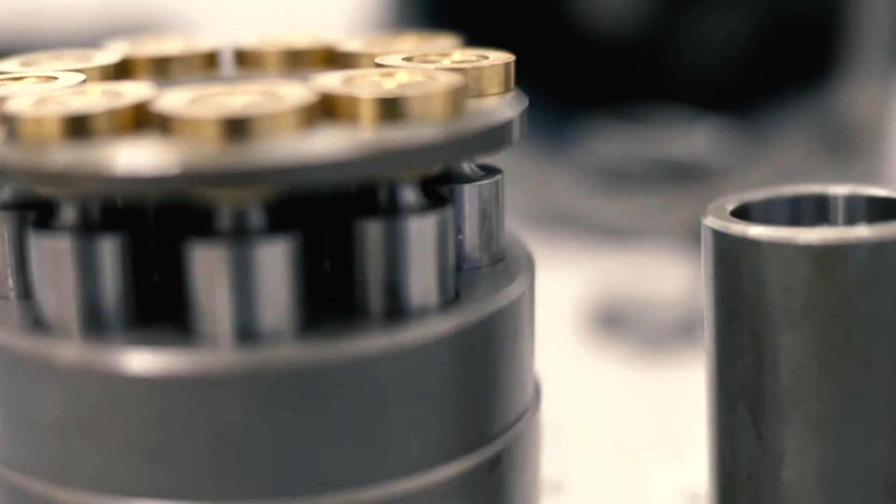My name's Oliver Starr. I'm Managing Director and owner of Zeus Hydratech.

Zeus Hydratech are a hydraulic component supplier. We are authorised distributors for various major manufacturers of hydraulic components, and we distribute throughout the UK and internationally.

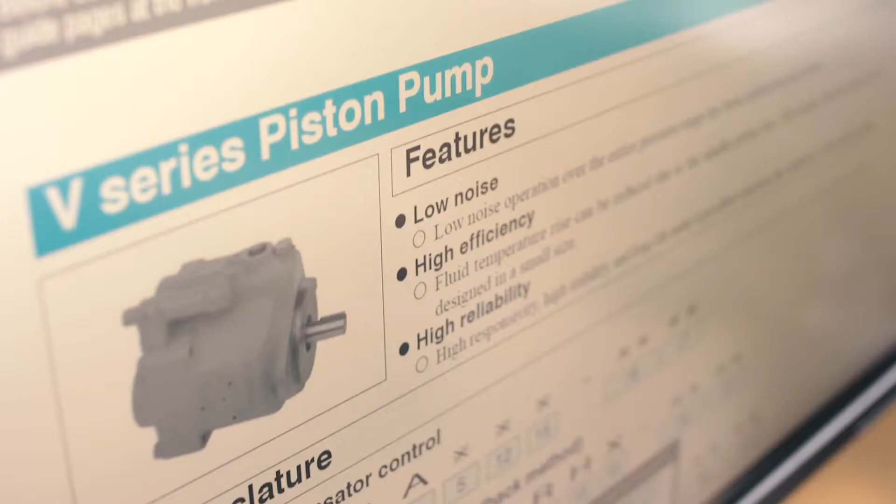We want to make sure that we represent quality and reliability as opposed to low value, high volume components. That's why I made the decision a while back that I wanted to be the one that's helpful, the supplier that could actually come back to them in a timely manner, give them the information that they wanted.

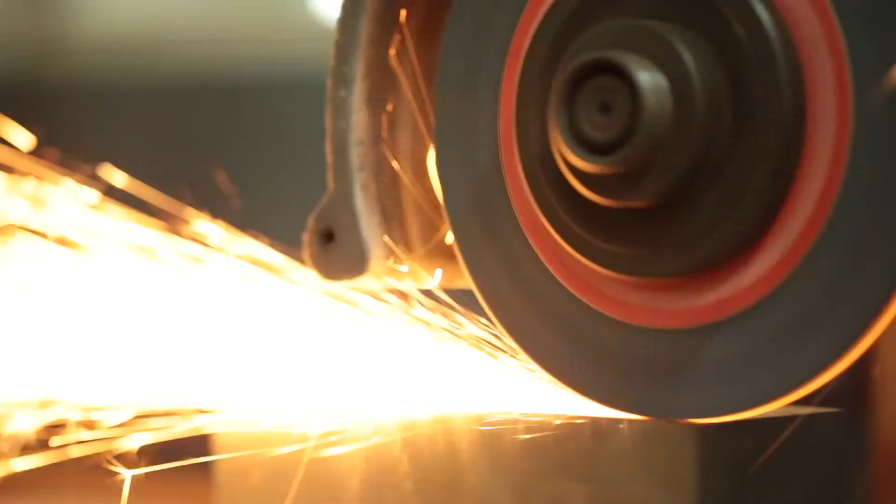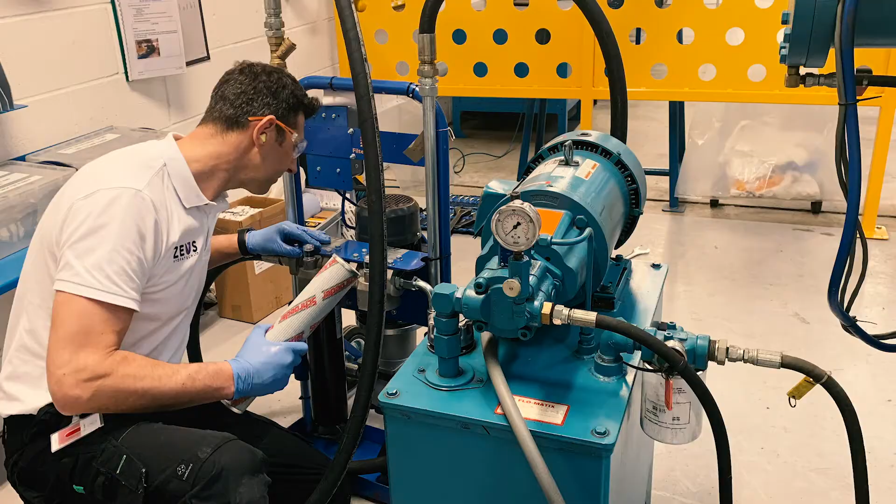Give them professional quotations, deliver goods on time, do what we say we're going to do. We appreciate that manufacturers don't always have their own in-house hydraulic engineers, or they have engineers that perhaps don't have the expertise to look after their own equipment. So within the local region, we offer the service to go to sites and give complete refurbishment of their hydraulic power pack systems.

Redcliffe do a lot of AOG work, which is aircraft on ground - it's emergency spare part manufacturing. In an instance where we get Airbus calling us saying we need this component as soon as you can get it, we can't afford to have machinery break down.

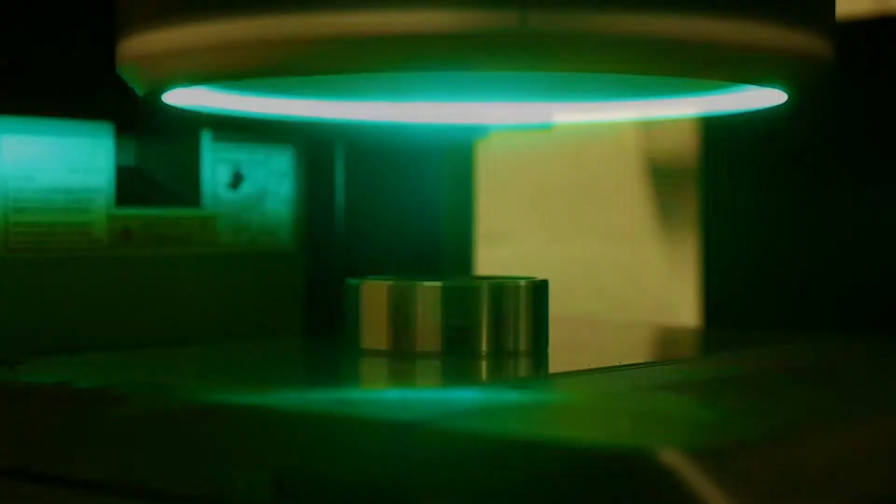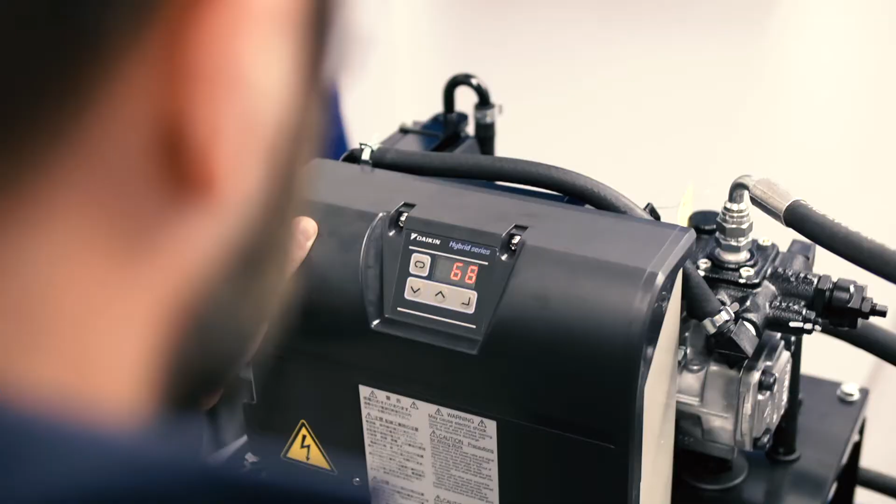We had a problem with an old machine where the configuration of the power pack wasn't quite correct, even though we'd followed all the information that came with the machine. And Zeus went way beyond what I was expecting. They sent a man out instantly, took the power pack back and configured it correctly so it would work with the machine and silence the alarm that was going off.

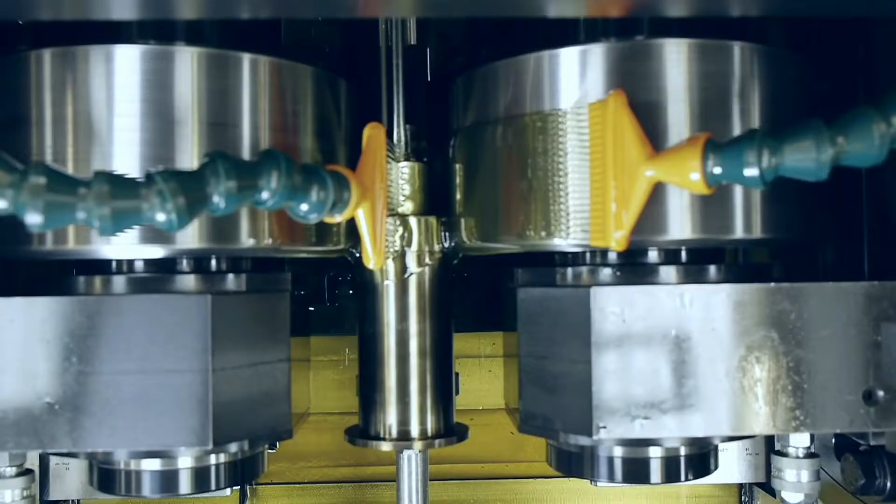Given the size of the contract for Redcliffe, it was important that we were able to react quickly. The fact that we've been able to give them that service has given them complete reassurance and confidence in Zeus, and that's why they continue to come back to us and rely on us the way they do.

They obviously know their kit inside out. And in fact, one of the independent machine vendors just said, just go to Zeus Hydratech, they know what they're doing. We'll just add a margin and make it complicated.

Downtime for manufacturers is clearly an undesirable scenario, so the reason we nominate quality hydraulic components is to ensure that downtime is reduced to an absolute minimum. One thing that has allowed us to work with some fairly big names is the fact that we are ISO 9001 accredited, which is the quality system.

We were approached by a major Formula One racing team. They were actually after a simple filtration system to prevent moisture entering their hydraulic system. As the packs are being flown to different countries, they were having issue with moisture ingress.

That conversation very quickly led on to them asking if we could design a new hydraulic power pack system, which was quite a complex design. It had to be very compact. It had to increase on the pressure that it could achieve.

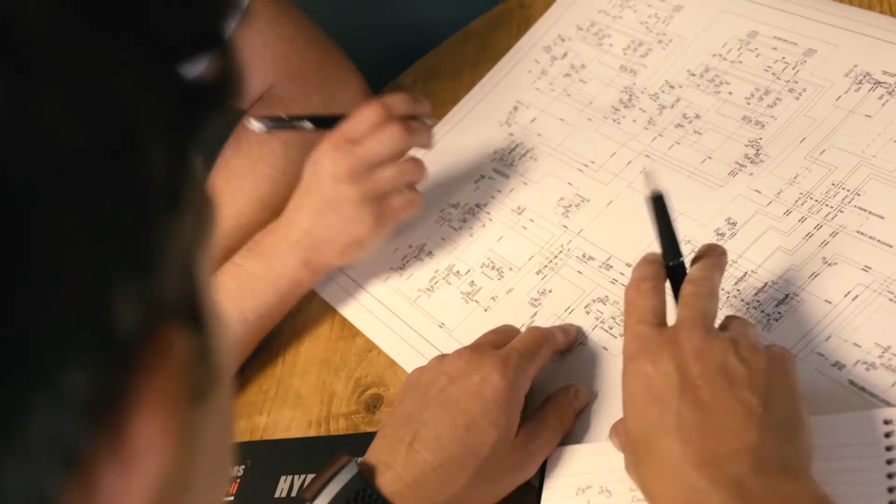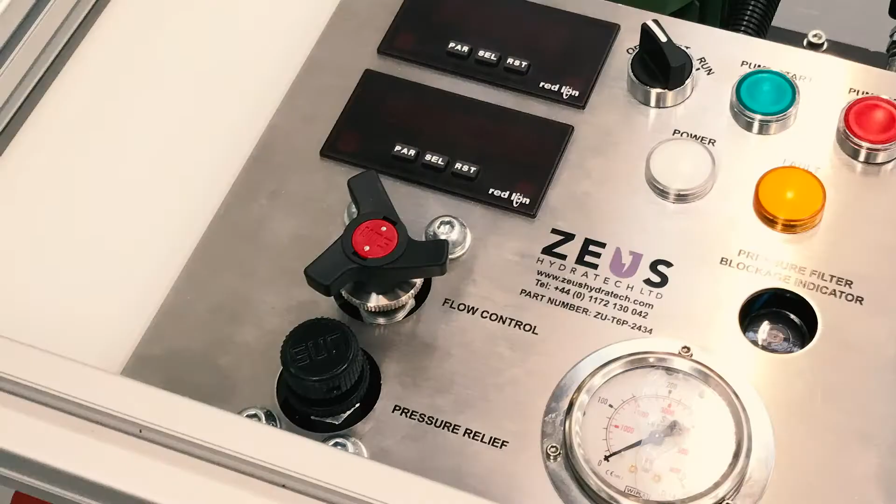Formula One cars, their hydraulic system runs at a very high temperature. At that high temperature, most hydraulic systems are starting to fall down. So we had to find a series of components that could happily run at 90+ degrees. Working with a partner of ours in the north of the UK, we were able to design a completely bespoke, portable hydraulic system that was able to fulfill the requirements of the Formula One team.

We've actually just received an order for another commission. I think it's important for large manufacturers to have the confidence in a supplier that they're going to have a quality system in place to follow procedures through the way it should be done properly.

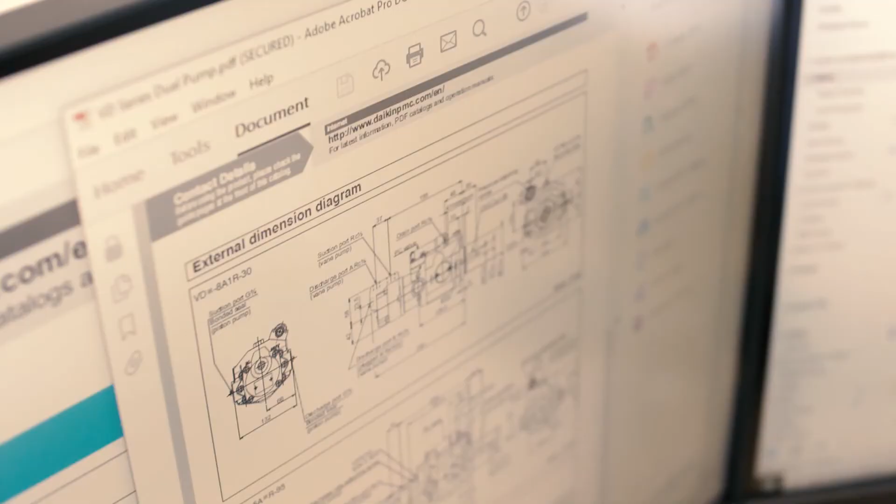Genuinely, for me, the USP is us as people and the team that we have here. I need to make sure that when people ring up, they have an enjoyable, informative and professional experience. Zeus were exceptionally easy to deal with because they're experts in the kit that they provide.

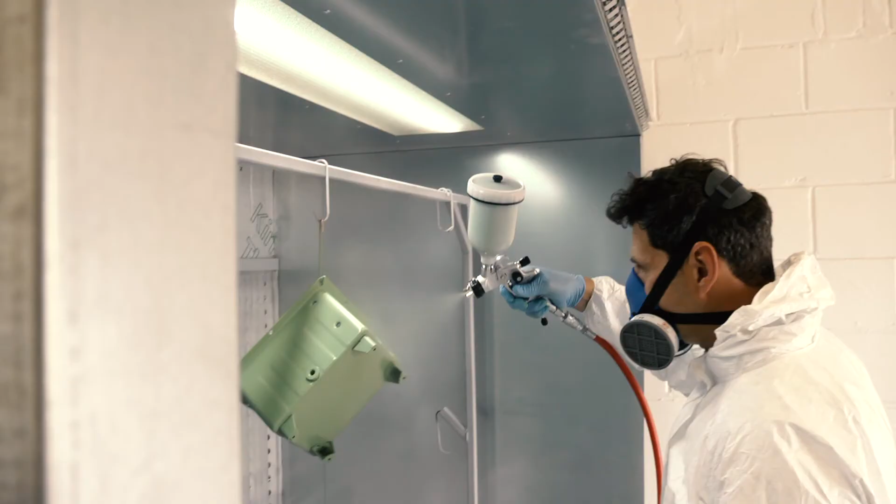I feel very positive about moving forward out of 2020, continuing to give our customers the great customer service that they've become accustomed to. The core values that we've built right from the beginning will still be there. They always will be there. That's what built Zeus. We're just really excited to move forward and we look forward to serving our customers.